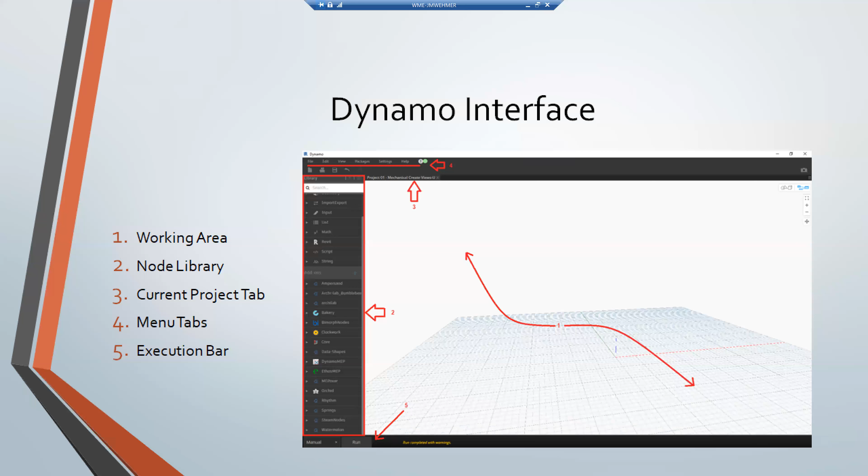Let's get started. All right, so this is our Dynamo interface. As you can see, we've got this big open area for working - that's where we're going to drop our nodes that we see from the node library, number 2. You can just go through and you can see it's separated into two pieces where it's got out of the box, and then it's got a separator for add-ons - those are all packages that you can download from other users. Number 3 just shows you what your current project that you're in.

And then number 4 is the menu tabs. It's very intuitive, it's Windows-based, so it's intuitive, and it's a lot like Revit. And then the execution bar down on the bottom, that's when you're ready to make Dynamo talk to Revit. That's how you push and pull data from Revit or push and pull from Excel, whatever kind of function you're going to be running.

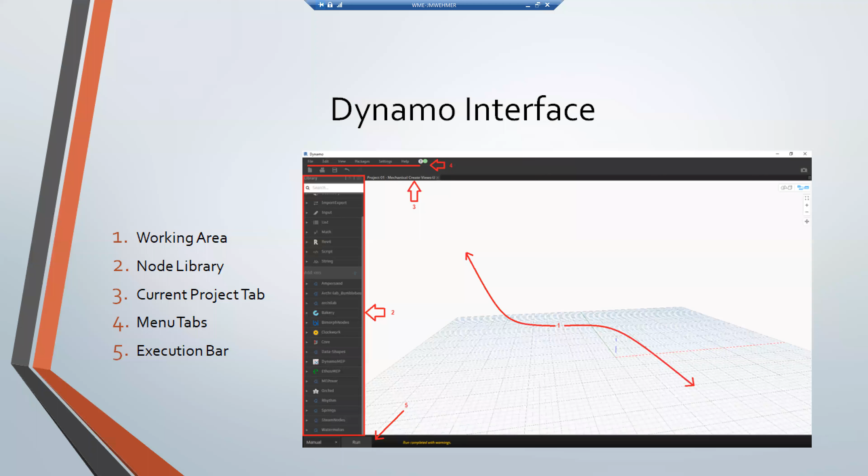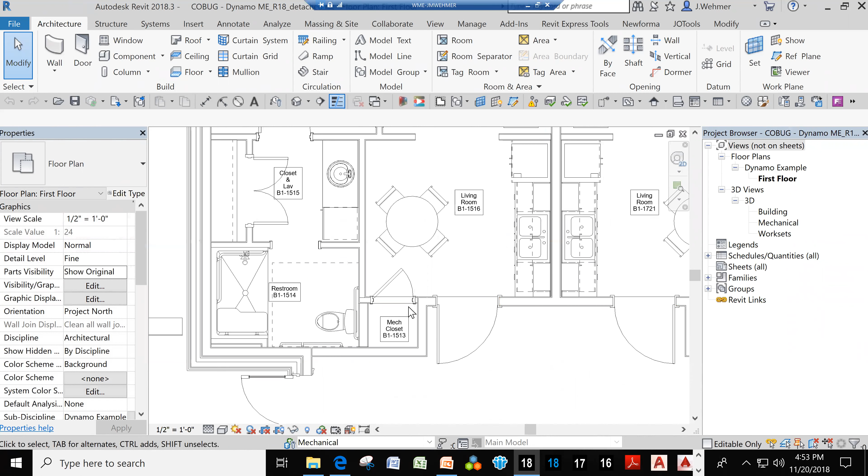So say we need to place a whole bunch of air handling units, and you can use this for any discipline that you want. We want to put them in these mechanical closets, and that's a room, I believe. Let's wait for it to stop regenerating. Yep, that's a room. So say we want to go in and immediately place it in it. There might be 100 of those in the project, and I don't want to place 100 of them manually. That, to me, would just be extremely boring.

So let's fire up Dynamo. To get to Dynamo, you go to Manage. I have mine docked down here because I like to dock the buttons. If you ever want to dock them, just right-click and hit Add to Quick Access Toolbar, and that'll add it up here, but then you can bump them down low. So let's fire up Dynamo.

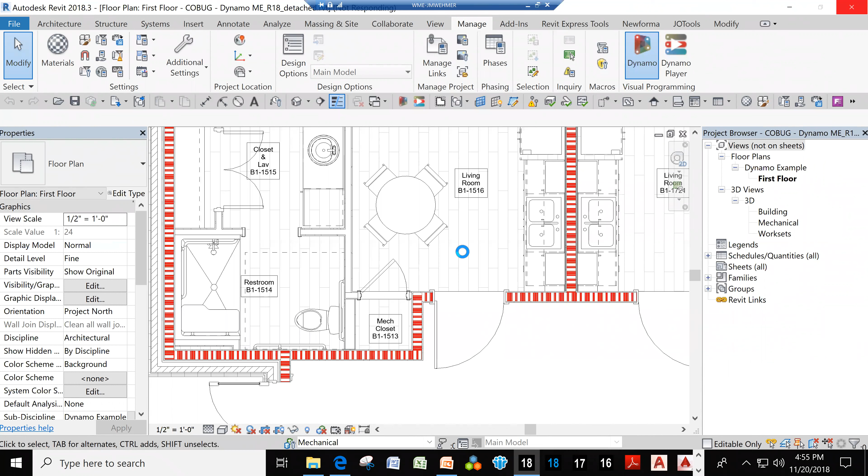Oh man, Dynamo is really taking its time today. And it's a normal thing for your computer to do the not responding. Dynamo and Revit take a lot out of your computer, so save and synchronize frequently. That's another best practice I should bring up.

You can just click over here and do your open, but I always recommend going to the open and then clicking your family or your Dynamo file that you need, and making sure that open in manual execution mode is always checked. If you open it in automatic, there's a chance it will crash your computer. It's very hard on your RAM if you're not careful.

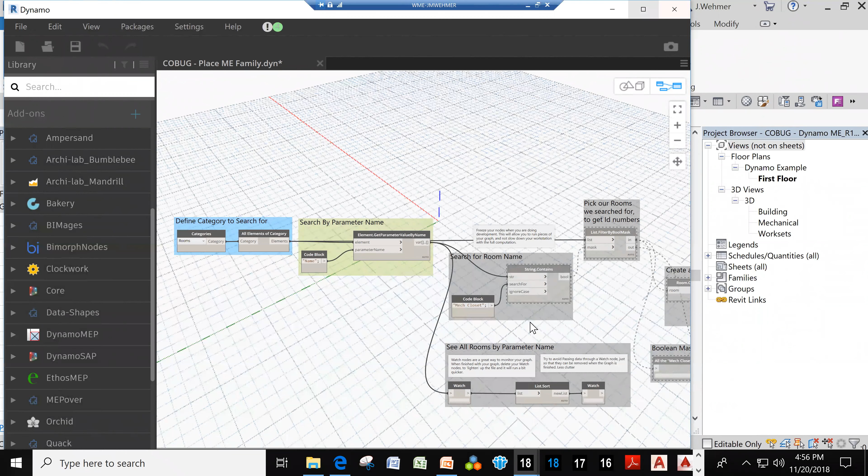Alrighty, that one opened up pretty quick. Widen up this screen and go through this a little bit. Alrighty, so whenever you start off, you always have to bring data in from Revit.

You have to know what you're looking for. In this case, we're looking for rooms because we want to find all of those rooms that have the name mechanical closet or mech closet. So we're going to get the category of room.

This is literally just the categories that you see when you go to visibility graphics and stuff like that. Anything - you can reach into Revit and get anything that you need on this list. See, it's quite comprehensive. So we're going to click out here and stay with our rooms.

And then all elements of category. If you leave it on just category, Dynamo is just going to say, oh, you just want the category room, and give you the name room. But if you do all elements of category, it's going to grab you every room in the project.

So let's hit run. I do have this one frozen over here so that it won't try and run our whole graph and take forever.

Alrighty, so see, we got just rooms. If you had that singular without this all elements of category, that's all it would display. But since you have the all elements of category, it's going to give you every room in the project along with their ID number, so that you can click this

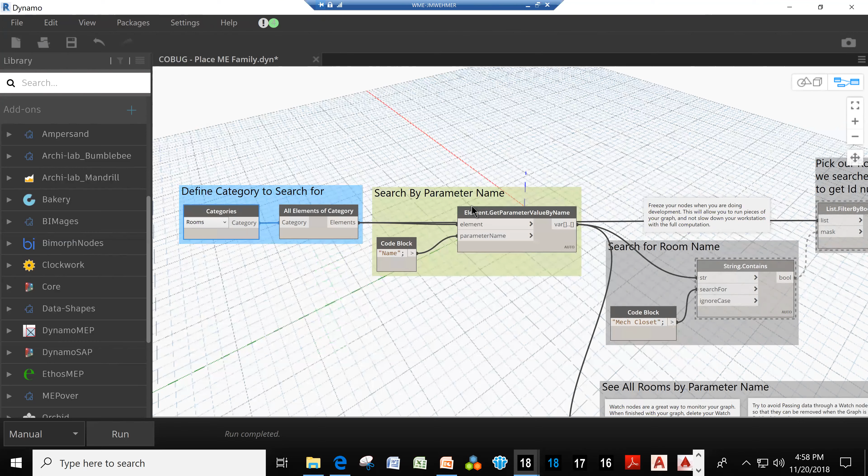So let's come over here. This is where you're getting a specific parameter. And if you hover over the name on most of the boxes, or on most of the nodes, they'll tell you what their purpose is.

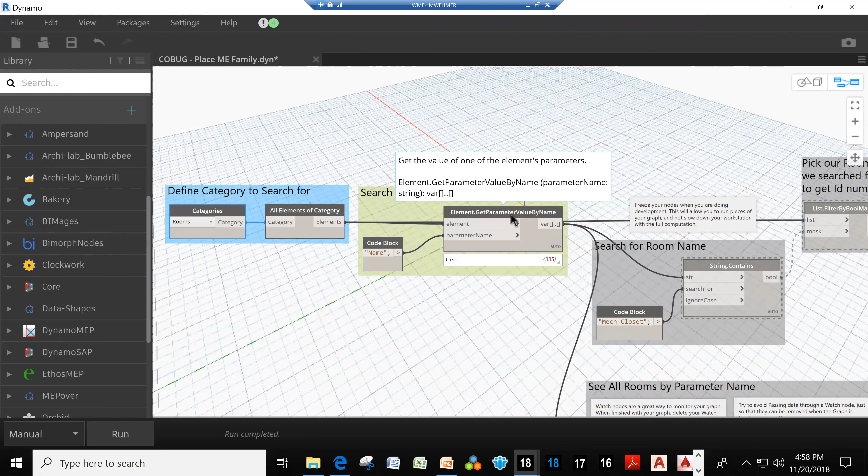And then you see at the very end of that, it's got parameter name, string, and then var, bracket bracket, dot dot bracket bracket. That means it's looking for a variable type parameter. So you can enter numbers, you can enter names, you can enter anything that you want into that bracket, just so long as it has a number like this after it. And you'll experiment later on and you'll realize there's a bunch of different ways to get data into that.

And out of all the elements that we're getting there, we're going to look for its name. So that would be the same thing as going over - coming over here. Of course I had it and then I lost it. There we go. Coming over here and looking for name, Mech Closet.

That's all it's doing. It's just jumping over to the Revit file real quick, and it's looking for all the names. So once it does that, it comes back with 335 names, and they all correspond exactly to how they are on this list. So we know that's a mechanical closet right there. And it gives you the names out of everything in here.

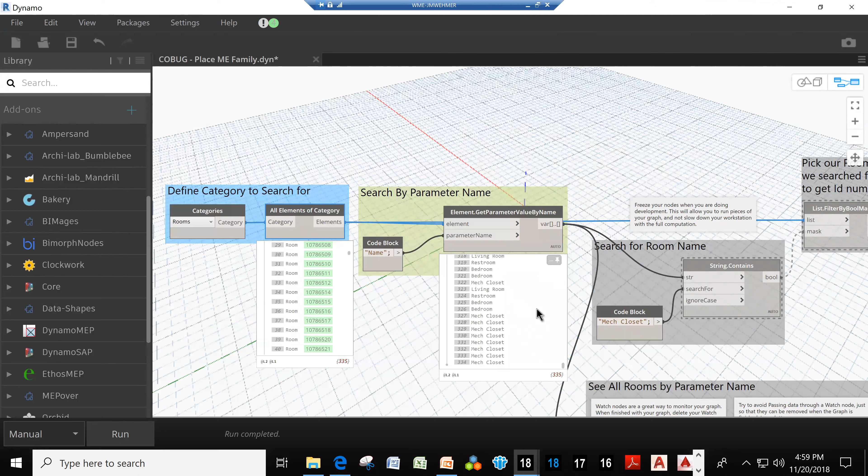After that, we're telling it to go search for a room name, mechanical closet. I also have, for the sake of this presentation, a little wire drawn down here, just so you can see how we can...

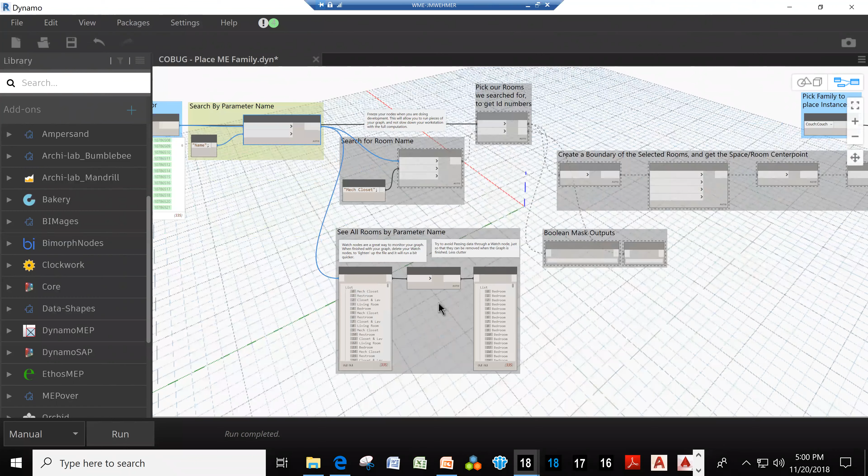Sorry, my computer's being a little slow today. Alright, just so you can see how we can play... oh, too much. I cannot find a nice middle ground here. That'll work.

This is the wire that came straight from getting the room names. Watch nodes are, again, a great way to monitor your graph. They don't take up hardly any memory, and they show you what data is going through. You can also sort them, put them alphabetical if you want. There's a bunch of different ways to sort them, but the default sort node will put them alphabetically.

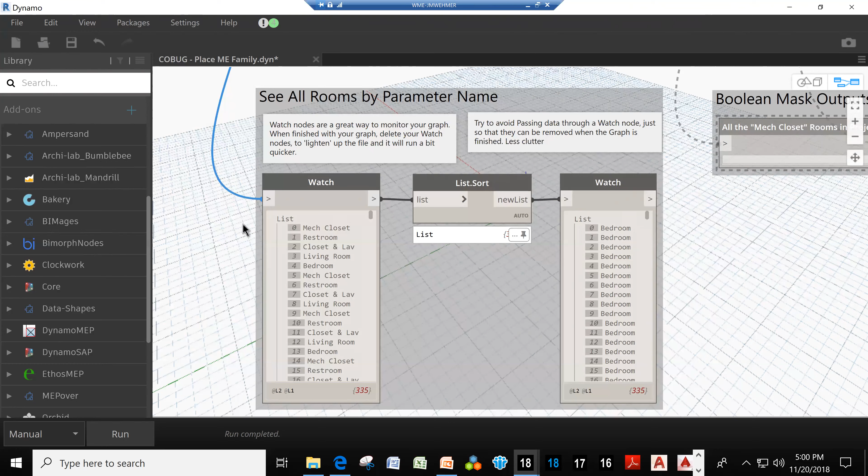Not planning on doing anything with that data. I just wanted to show y'all some of how you can organize it.

I'm in our conference room, remote linked to my workstation, so it's a little laggy.

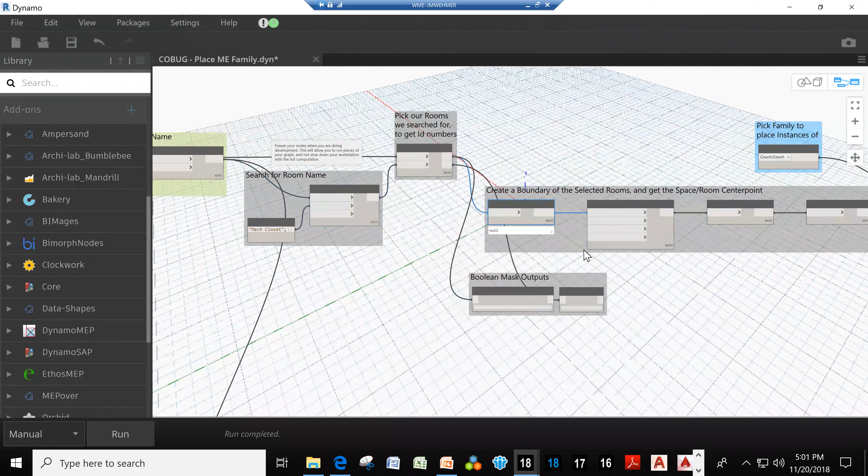Over here, we're going to unfreeze this, but I'm going to go ahead and leave that frozen just so it doesn't run our whole graph just yet. Alright, so we're going to search for a room name. Keep scrolling. Alright, good, we're going to search for a string that contains room name.

You feed in that variable as a string, and then you're searching for Mech Closet. You can ignore the case if you wanted to. I usually leave it, since the default value is false. I usually leave it on that.

That will tell you—drop this guy back down, scroll all the way up. That will look at each individual piece and tell you if that name contains Mech Closet.

So we got instance 0, Mech Closet, true. Instance 1, restroom, that's false. You go all the way down to instance 5, Mech Closet. It will give you a true/false value for every one of them.

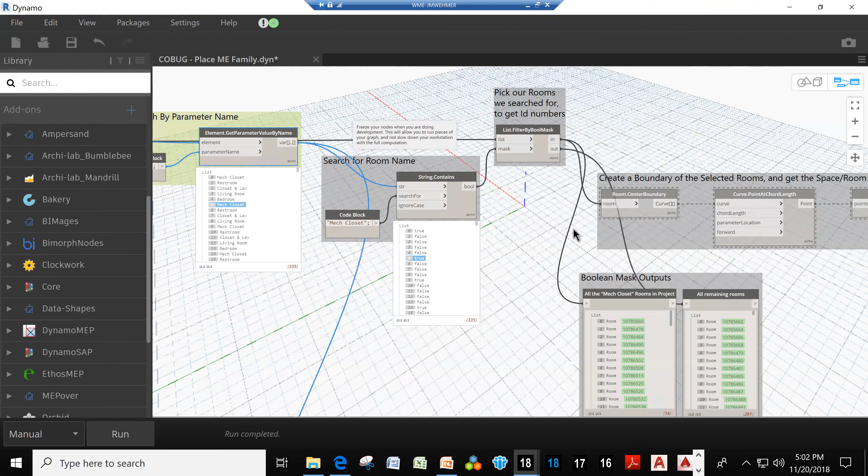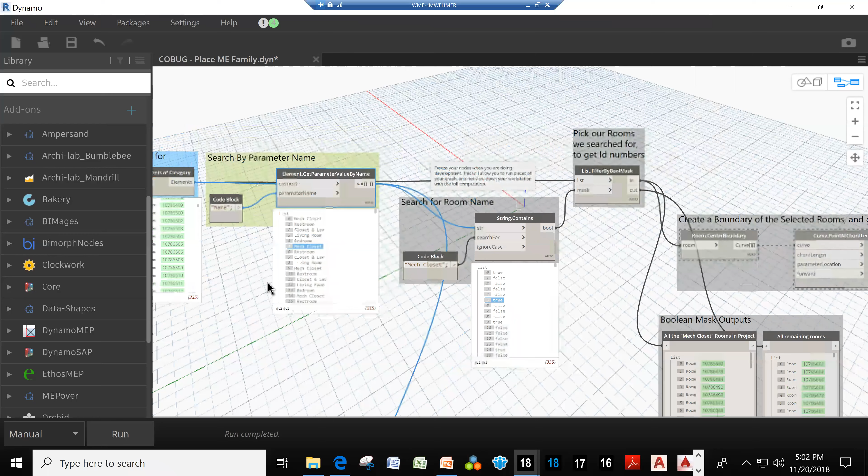But as you notice, it doesn't have a number after it anymore. After we went through get parameter value by name, it removed that element ID from it. You can't find that element anymore in your model now. You know the name of it, but Dynamo can't run the direct element anymore. It can get you that data and manipulate the data all day long, but it doesn't have anything to reapply it to.

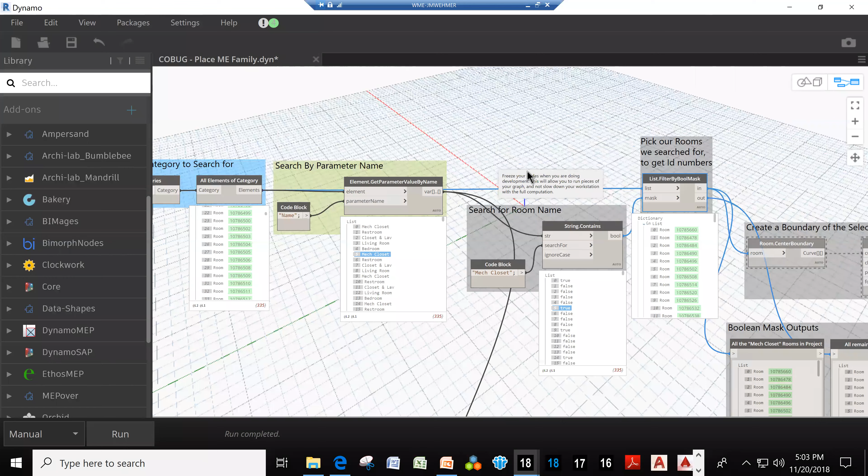That's where list filter by bool mask comes in. That will create you a dictionary that takes this variable as your list and your boolean value that you had here. And let me scroll over just a little bit. It will match—too far—it will match every true with the corresponding room. That way you can reapply it.

You can be like, oh, so everything in this list right here—you can see it breaks it down into in list, out list. The in list is everything that contains room, mechanical closet.

So that is, let me click that again. That is all 74 of these instances. And I say 74 because in programming, you start at 0. You don't start at 1.

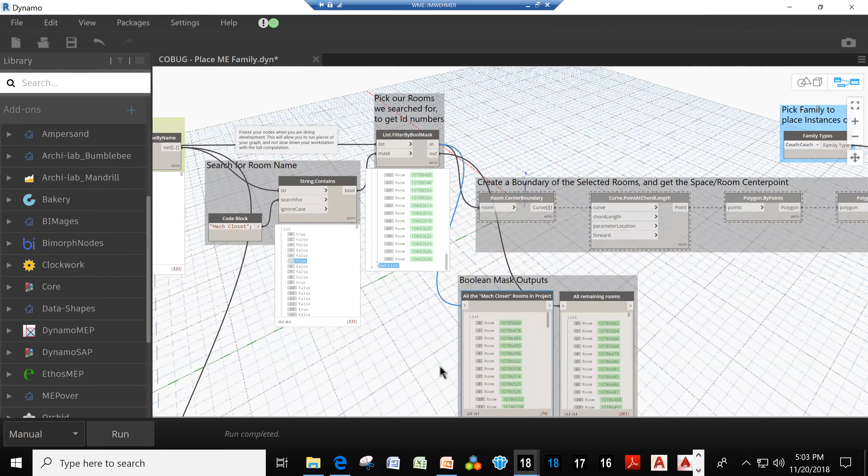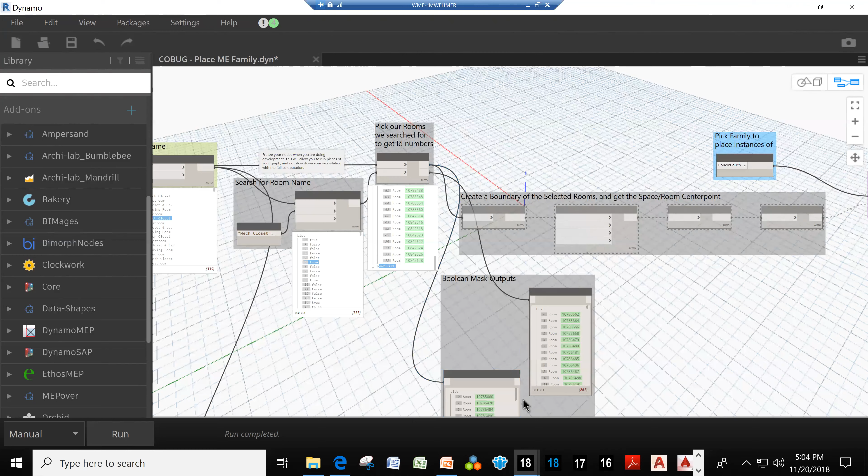So you see we have 74—no, I don't want to search anything. We have 74 instances here. Why is it trying to get me to still search? There we go. But this number will only go to—that is not what I wanted. Boy, long day today. Oh well, I'll just deal with that down there. Okay, apparently it's...

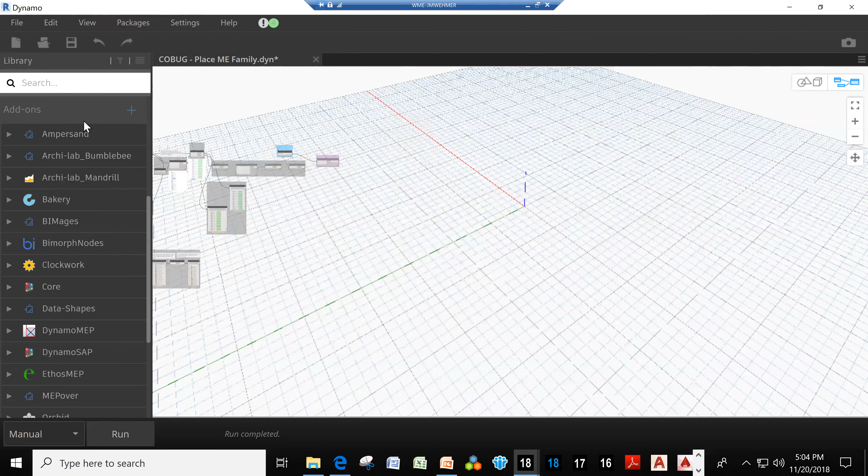But as you can see, it only goes to 73. That's just the way a lot of programming works—instead of starting at 1, they start at 0. So that's one thing that will take a little bit of getting used to once you start referencing data and writing your own code, is that it's not going to start at 1.

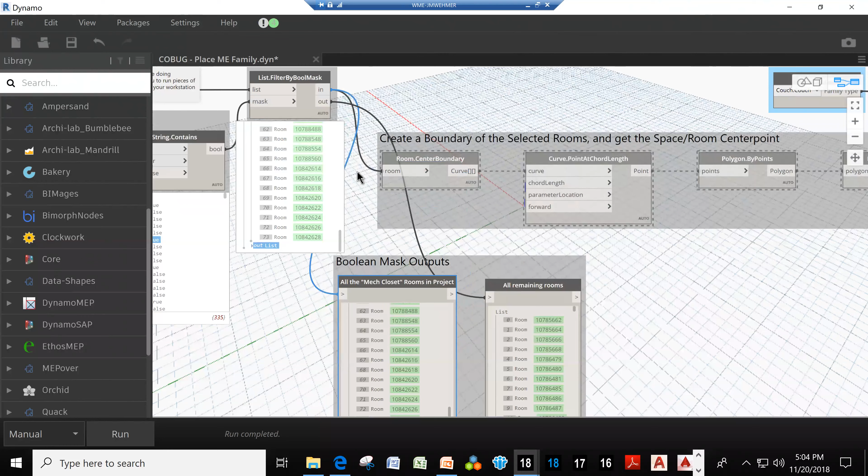So now we take—if I stop zooming in and out like a crazy person—now we take all that data, as you can see, that comes from the in that corresponds to those mechanical closets. We take that and we're going to start drawing lines on our model.

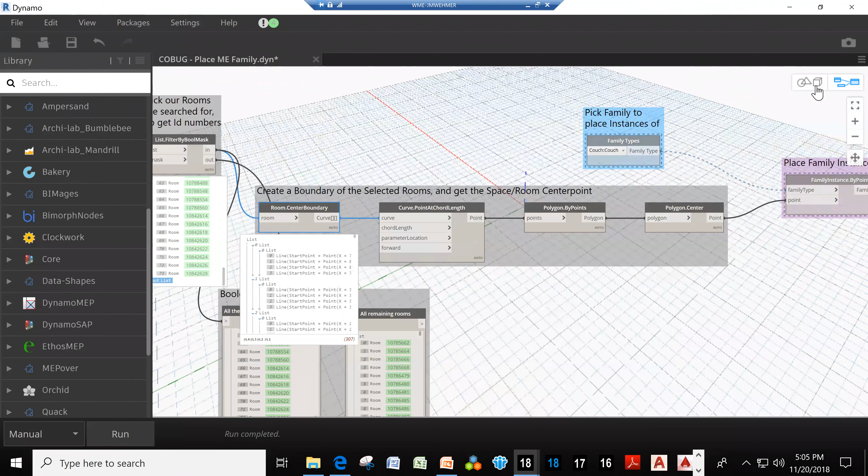We're going to start drawing lines, just little temporary Dynamo lines. You can see it gives you the start, the end, and it's 4 segments for every line point. So let's click this button right here, and we go to enabling 3D within Dynamo.

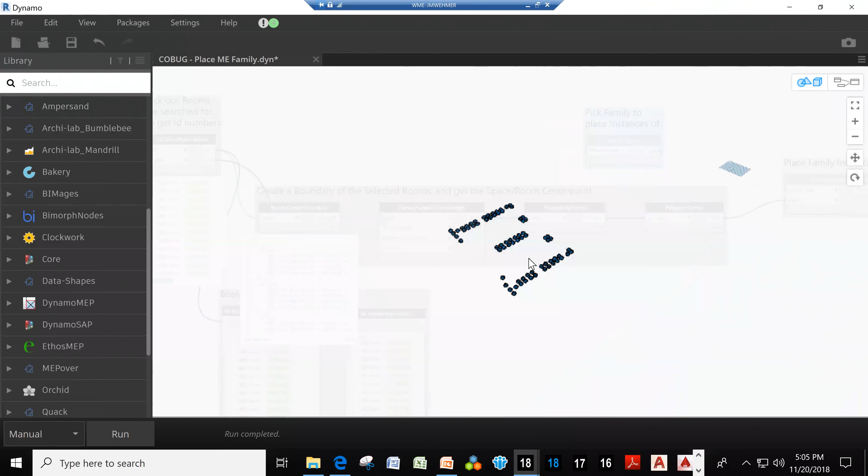We're going to zoom out on our graph and find where Dynamo is drawing these lines. Remember that it talks with Revit, so wherever Revit is at in the model, we are way off here. Our project center is way different than Dynamo's center.

As you can see, it found all the mechanical rooms, and it just drew little reference lines in there. It drew the boundary of the room, and then it drew the center point of those lines so it could get a little centroid there.

So we're going to go back over to our node. To get back to nodes, you just hit this one, Enable Graph View. You can switch between the two pretty easily.

That drew us little chords, and then a polygon to go with them, and then a point at the middle of the polygon. The point at that middle of the polygon is where the center of your Revit family is going to be placed.

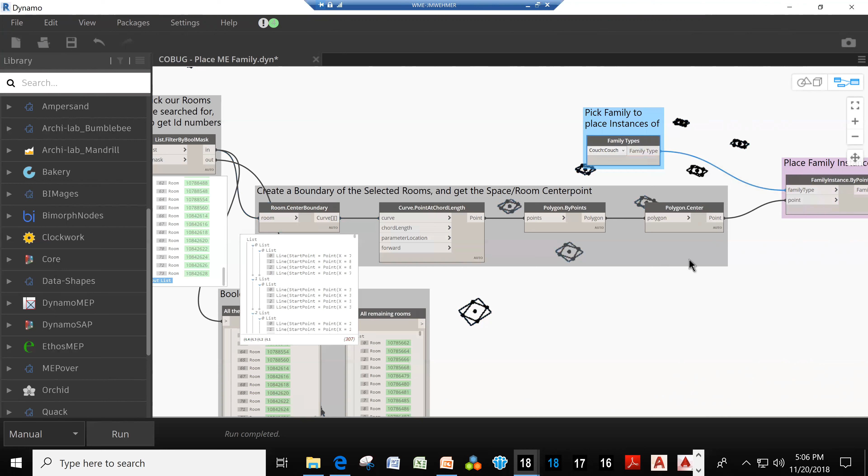So it's very important that whenever you build your Revit families, you build them on the center. I've seen some people do sloppy modeling and just build it in quadrant 2 or quadrant 1, wherever they feel like it. Just alone for Revit, that's bad practice, but then you try to communicate and program with it, and that's going to be more hassle for you.

Then family types, let's drop that down. We don't want a couch. We want, let's do... oh, I passed up what I wanted. Let's do the gas-fired furnace. So now we have a family that we're going to put here.

It's going to take that center reference plane of the family, look for this polygon center, and place it right on top of that. So let's hop over to Revit.

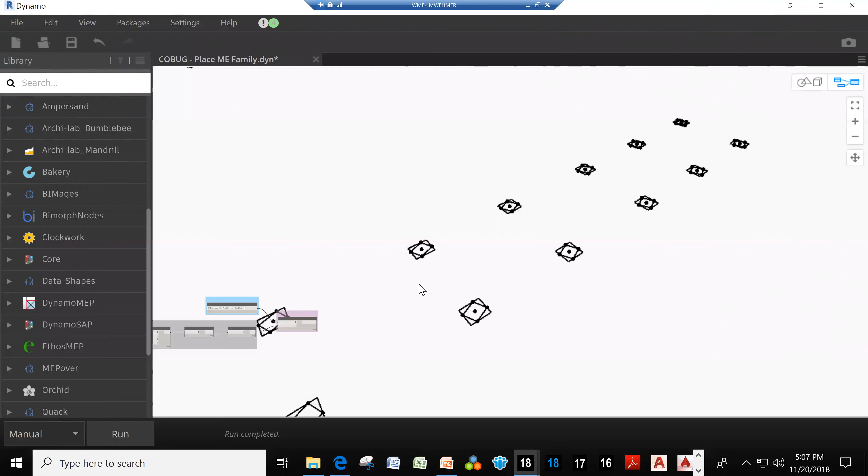Oh, I forgot, within Dynamo you have to collapse it in order to get to Revit, because it wants to be on top, it wants to be the popular one. So for that center point, you can see it's already drawn some temporary lines in our file, and it's got a little center point right underneath that mechanical closet tag.

If I can ever grab that tag... alright, that little point right there is where it's going to drop the middle of that family.

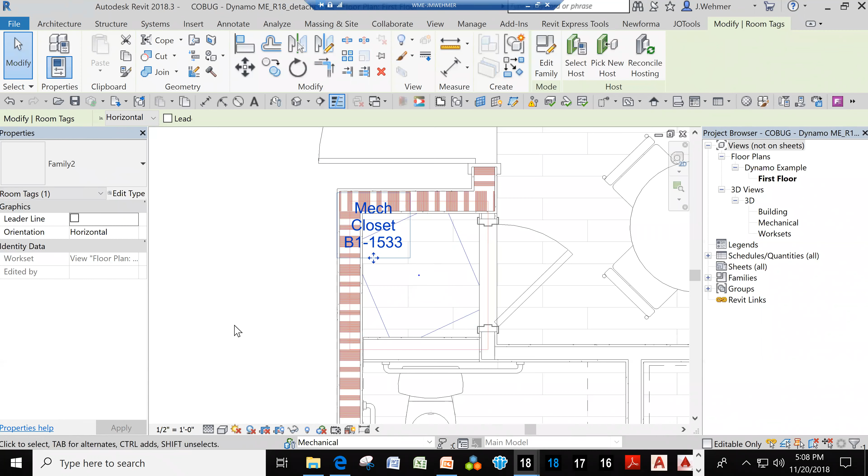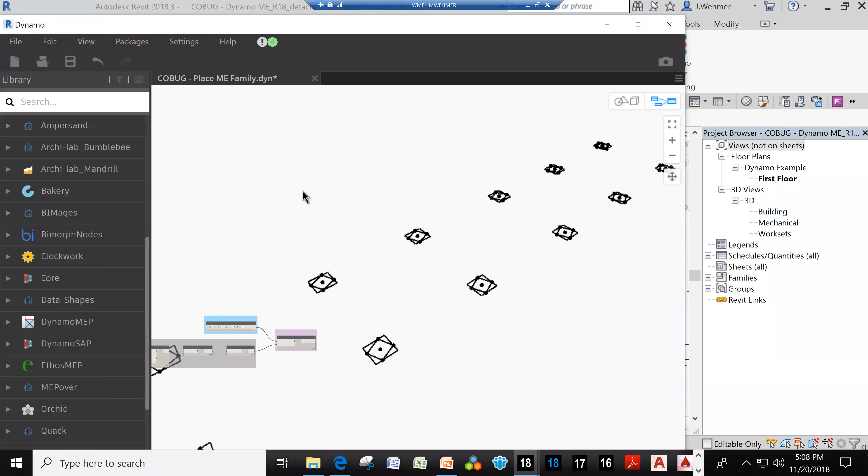So let's grab our Dynamo again. Just for the sake of it, I'm going to put these together. There we go. Then I'm going to come over here and hit run.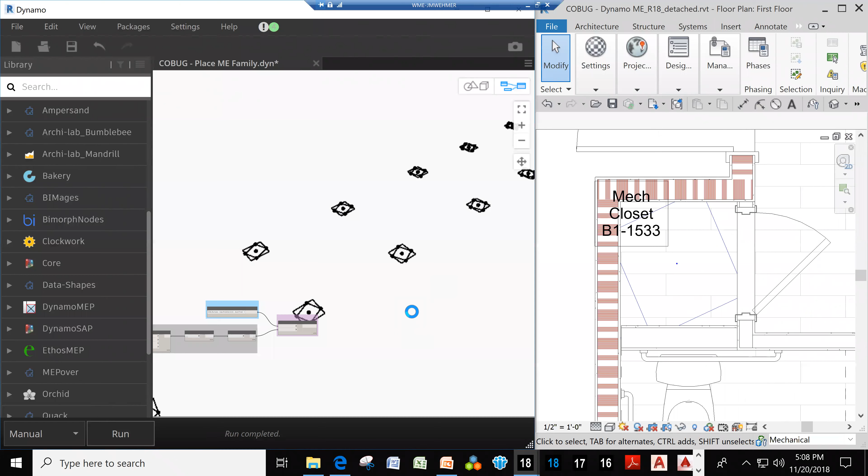We're going to be dropping a lot of families in place on this model, so it can take a minute. Don't be surprised, Dynamo is a slower form of programming than C# and direct Python interface, but it's much easier to get the hang of. So Dynamo will definitely save you time rather than drafting and doing everything by hand.

But be prepared to be looking at this spinning circle a lot while you use Dynamo. If you were doing this on a project, now would be a great time to go get a cup of coffee, go do what you need to, go get a snack, kind of take your time and catch up on the way back to the desk.

If I thought this was going to take more than 2 or 3 minutes, I would have already done this and had a file ready for y'all, but based on my testing today, it's not going to take more than a minute or two. So hopefully it doesn't.

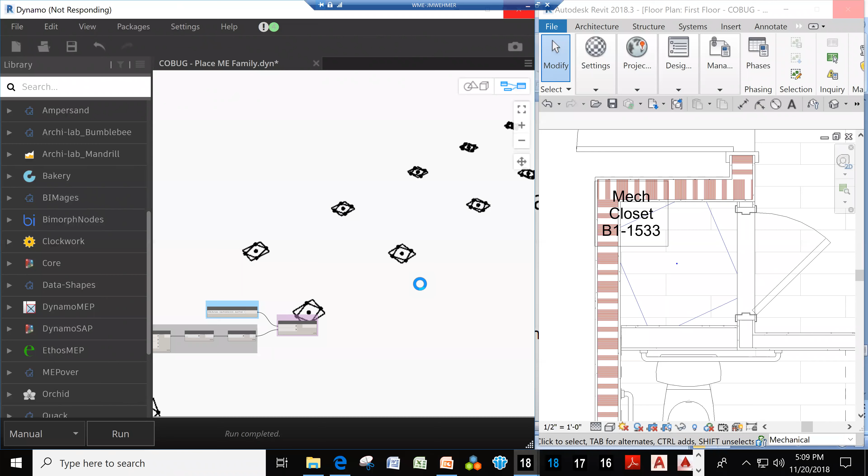And as you can see, Dynamo says it's not responding. That's pretty normal. There we go. Now we got our family in place. Let's make the Revit screen big again.

I forgot, Dynamo always wants to be on front, so you've got to close down Dynamo, or at least collapse it.

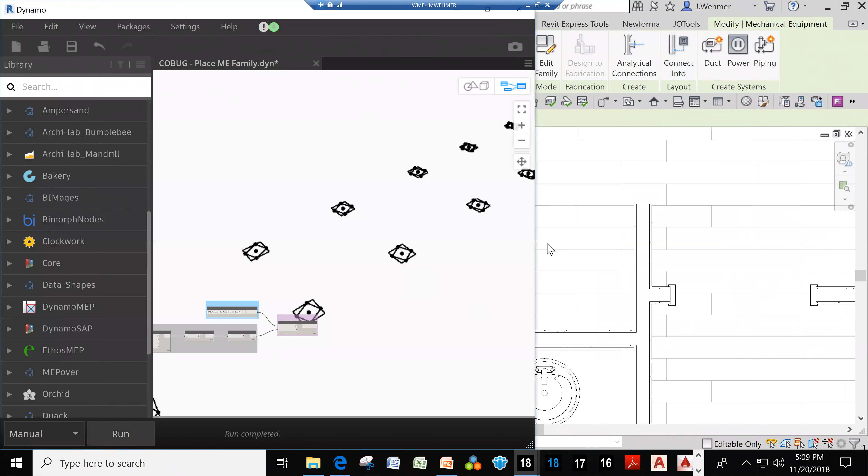Alrighty, so we wanted to put that gas-fired furnace down, and we got the gas-fired furnace. Now let's right-click it and select all instances visible in view. Let's see how many we placed. We just placed 74 of them.

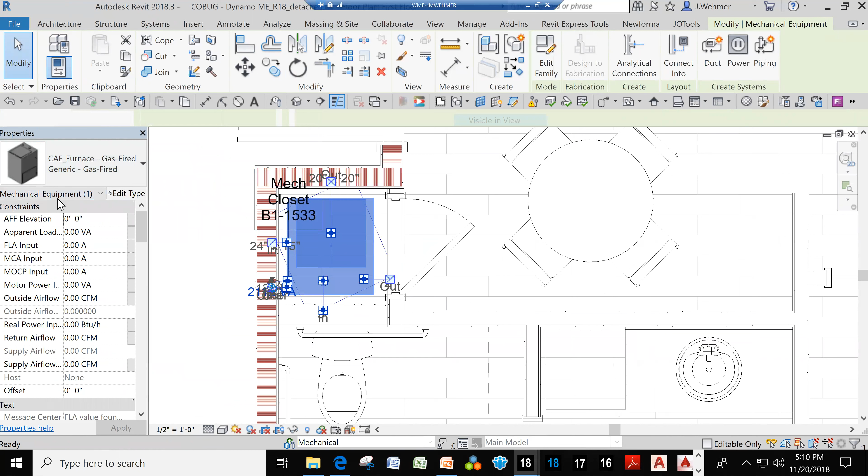So we basically just went through our entire first floor of the model and placed a whole bunch of those mechanical units.

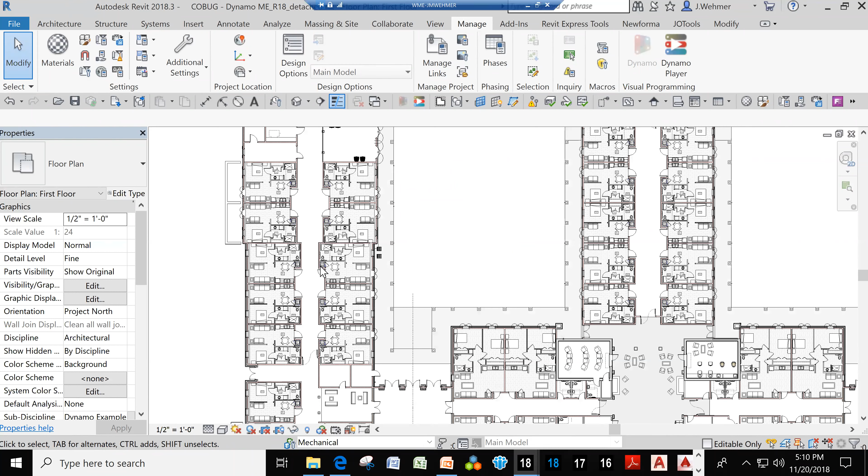As you can see, Dynamo still has those little bits drawn on there, those little blue lines. They'll go away once we close Dynamo. Those won't print, even if you printed it as is. It's literally just Dynamo referencing it.

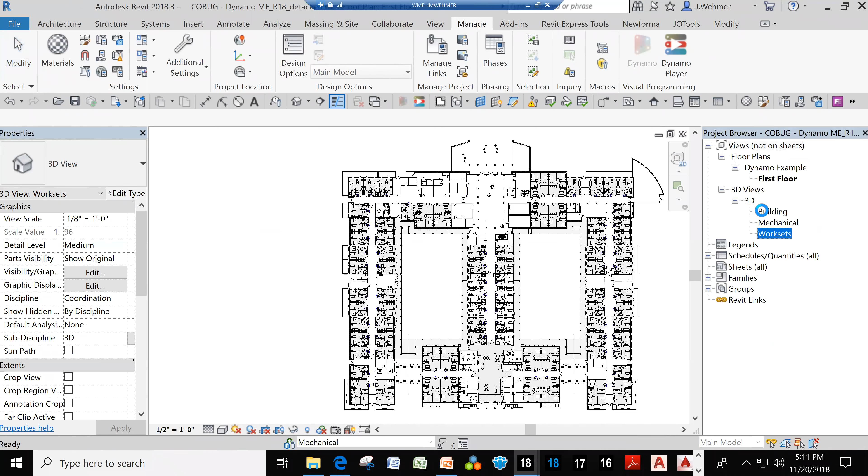So let's go to a little more friendly view for this. Let's go to our Worksets, to get just a better view of what all we created. And then let's turn on our work set display.

And as you can see, everything in that pinkish purple is architectural work set, whereas everything in green is mechanical work set, and that's all mechanical that we just placed. I've helped architects use this for laying out kitchens, bathrooms, and bedrooms. It's very useful, especially for apartment and residential style living like this.

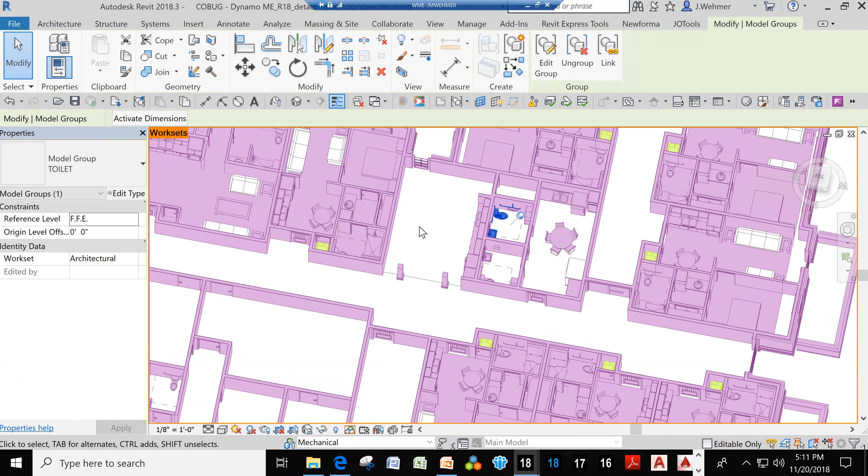It's just like groups, it just runs them throughout your model for you. So it's really helpful. You can basically place any that you want as long as the family is loaded into your project already. You can also do family modification, changing types. Say you wanted to change this love seat into a 3-cushion throughout the entire model.

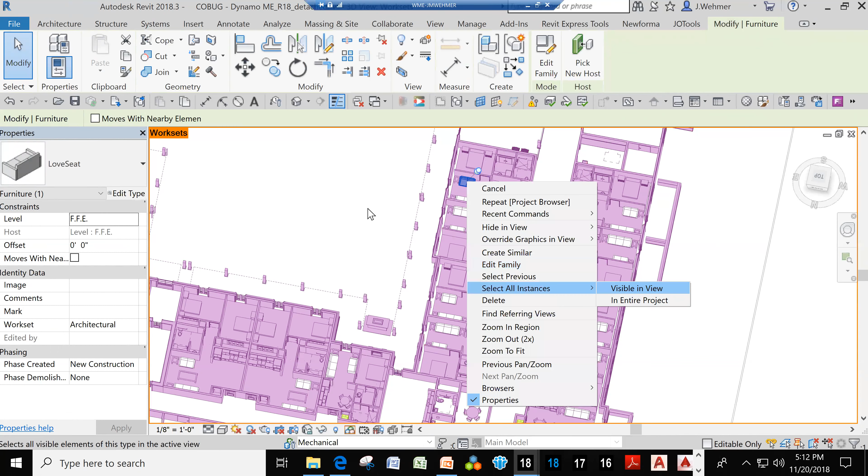You can do that with Revit or with Dynamo. You can easily swap them out, which Revit actually has that handy select all instances feature. But say you also wanted to change some parameters and give them separate scheduling features based on what room they're in. With Revit, you'd have to go room by room or piece by piece. But with Dynamo, you can have it do multiple functions all at the same time, and it works seamlessly with Revit.

So let's go ahead and close out of this one. We don't want to save our changes.

And then let's look at a project setup one. I'm going to close out of this project because this setup graph I'm about to open is really heavy on the computer. So we are literally just going to create a blank project, Imperial, and let's open Dynamo again.

After working with Dynamo for a while, you start to realize some of its little quirks, some of its little things that don't make any sense or seem like a huge weirdness. One of the things I've noticed is that loading large scripts is difficult on Dynamo right when you open it.

Don't know why, but I have found the most luck. Oh, before I jump into that, if you ever need to search for a node, hit right click and it brings up a search bar for you, and you can just type in whatever it is you're looking for.

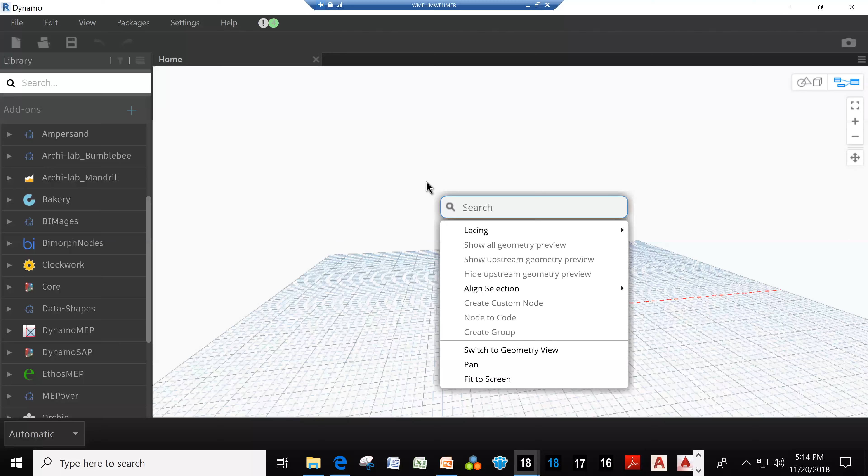So for some reason, when I start a new graph, place a watch node in there, and then go to open a really large script, it has almost no issues loading it. Of course, now that I say that, it's probably going to freeze this time and crash, but most of the time it doesn't have an issue with it.

My control bar for the webinar keeps trying to overtake this area. Here we go.

Alrighty, and of course always make sure that you're opening in manual mode, because as you can see, it opens default and automatic when you start a new graph. So if I open this in automatic, it would be trying to open this and run the program at the same time. That's not what we want to do, not yet.

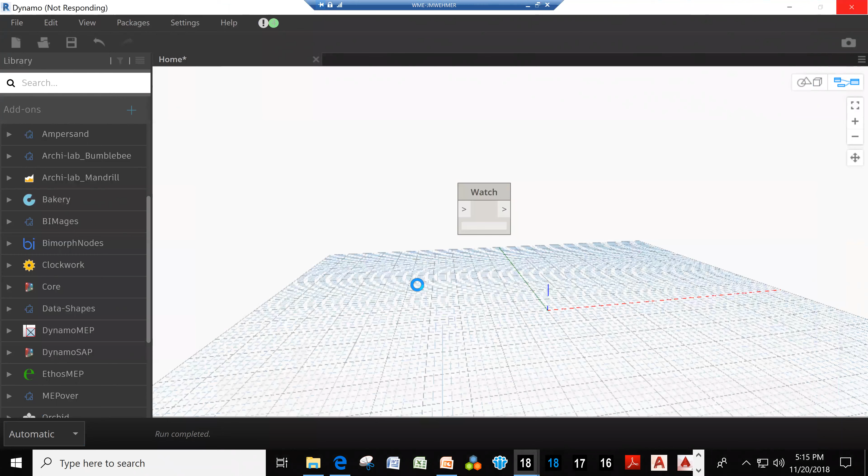And it is a big graph, so it takes a minute to open. I pared this one down to make it easy to manipulate while we're in such a short time for this. A great way to organize your graphs

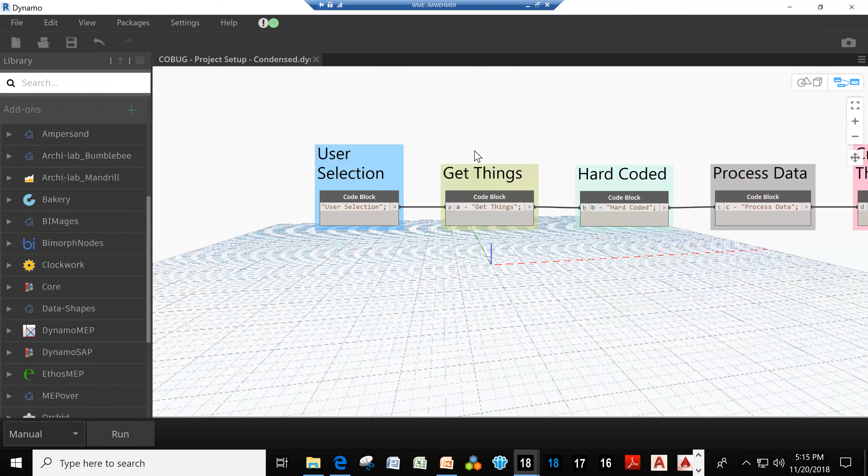is to come up with a little color chart for yourself of what's going to be user selection, what's getting things—in other words, basically just reaching into Revit, grabbing the data, and then doing whatever it wants to with it. What's going to be hard-coded? There are some things you just have to hard-code with some graphs whenever they're as specific as a project setup. You've got to have a plumbing version, a mechanical version, life safety, fire protection, electrical, etc., etc.

You're going to have to tell it to do some very discipline-specific functions, and then process that data—basically changing the units, changing parameter names, doing what you need to with it, shaping that Play-Doh, shaping that clay for it to create Dynamo things and create Revit things, and then ultimately writing and creating data. These are where Dynamo really shines, the last two.

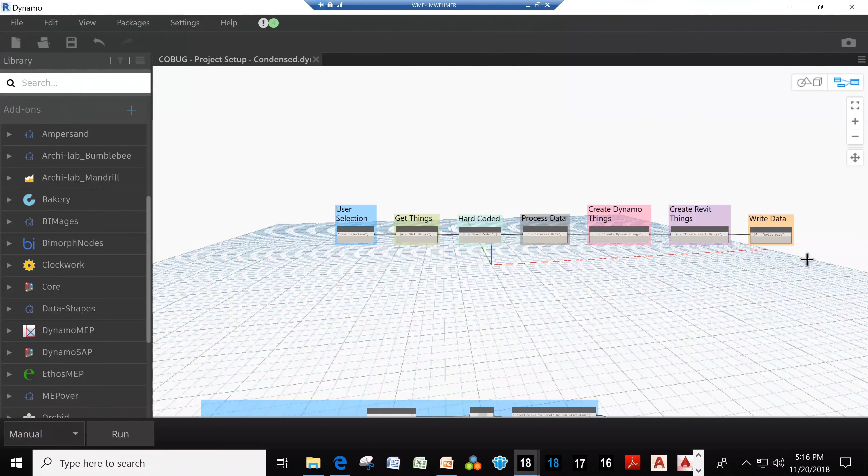So let's come over here. I cannot get this scrolling thing today. Let's come over here. I am going to freeze this node just so that it doesn't try and run our graph for us.

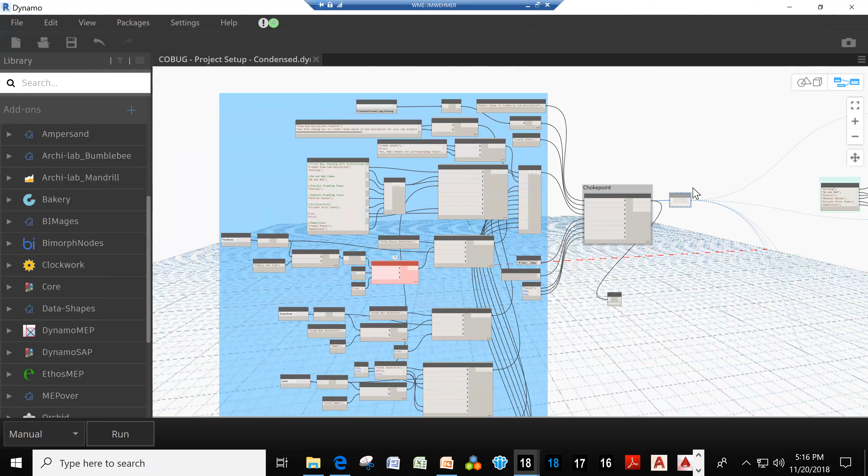This is all a user interface, basically just UI. It's meant that when I execute this run, a dialog box will pop up prompting the user. Oh, it's because my title block is not feeding properly. I'll just feed it all of it.

And then anytime you run Dynamo, you have to make a change to it. So switch false, and then run it again. I don't think it ran whenever I did it.

Alright, let's try this now. It is still giving us an error. But the user interface is basically just where... ah, that's annoying because I just ran this like an hour and a half ago and it worked fine.

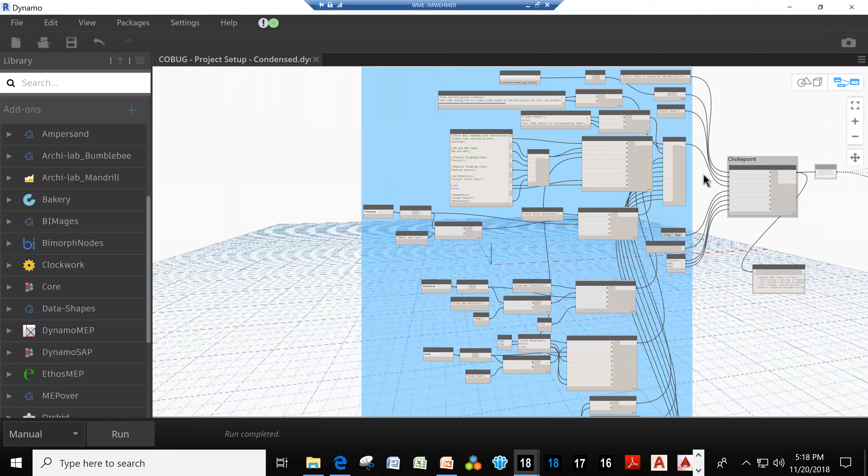It's still not. This always happens, it always... oh, I should switch it to true. That's...

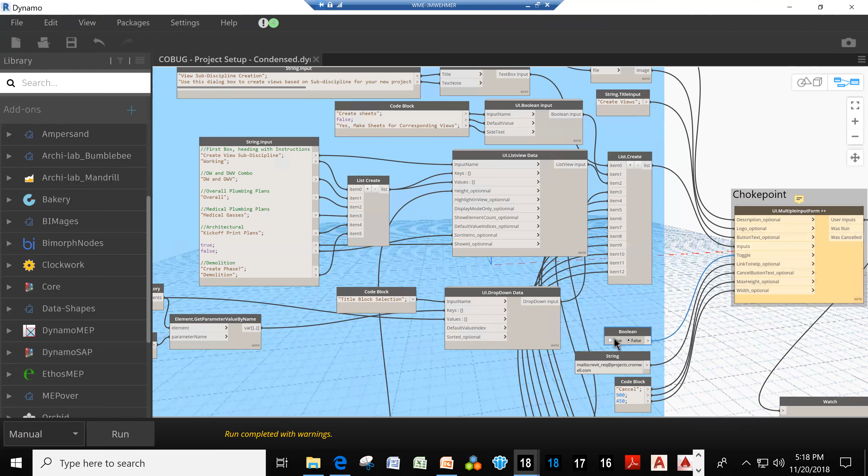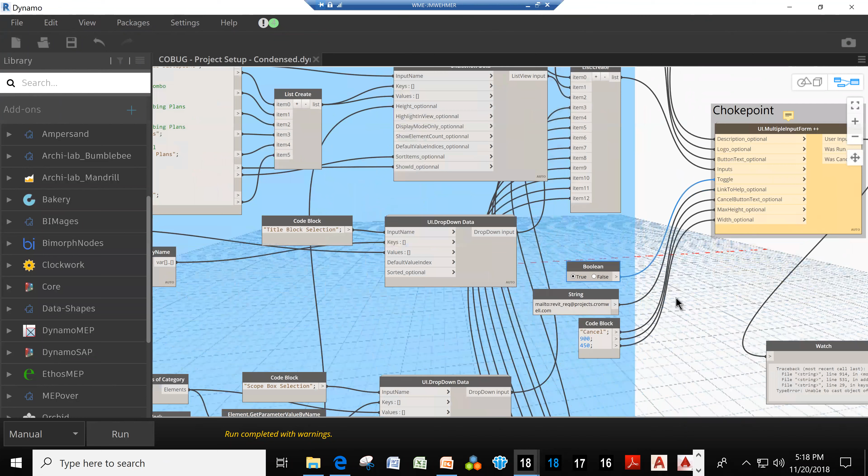Alright, I apologize for this. I ran it this afternoon and it went just fine. Well anyways, that's when it would pop up.

This one is for my plumbing project setup script. So let me zoom us back in here without zooming crazy fast. It would ask us if we want to create working views, domestic water and drain waste vent, overall, medical gas, and then those kickoff print plans that I was telling you about.

And then if we want to create them with phases, and then it'll ask us what title block we want to use, what scope box. You can basically have it create your entire list for you.

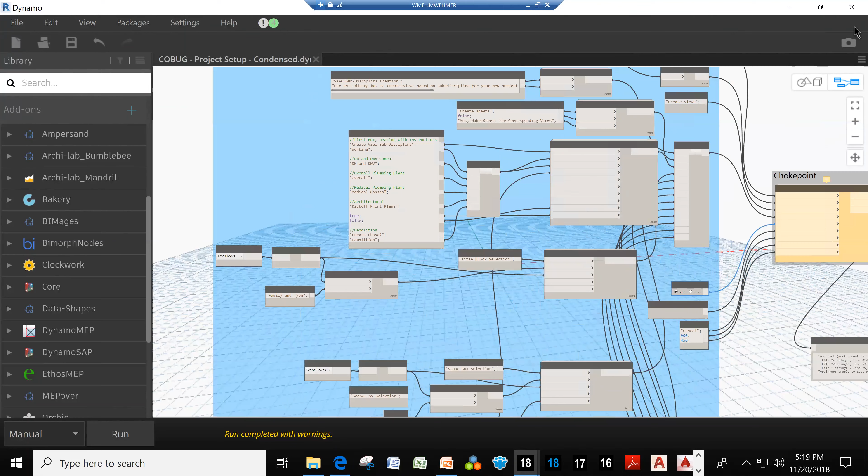And it is being really laggy today. I apologize for the lagginess of it. Then you basically just go through, and this is one of those times when hard coding is a thing.

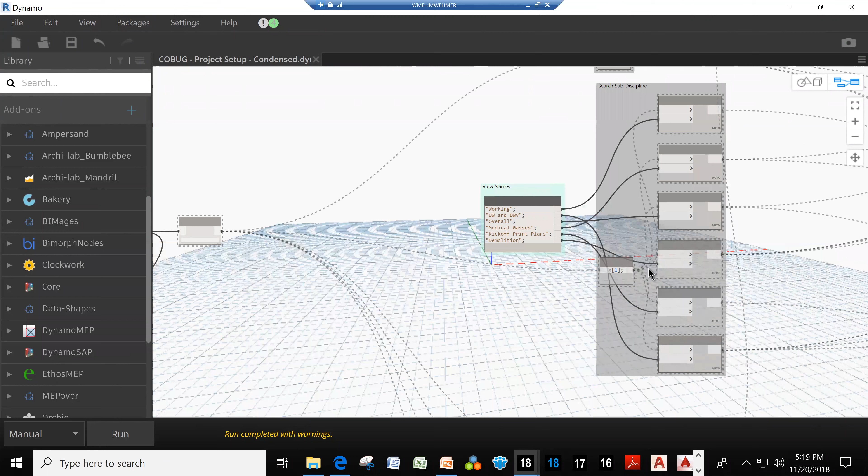You always have to tell it drain, waste, and vent, domestic water. You can't put that on a mechanical one. And then you don't want to flood the user interface with too much stuff.

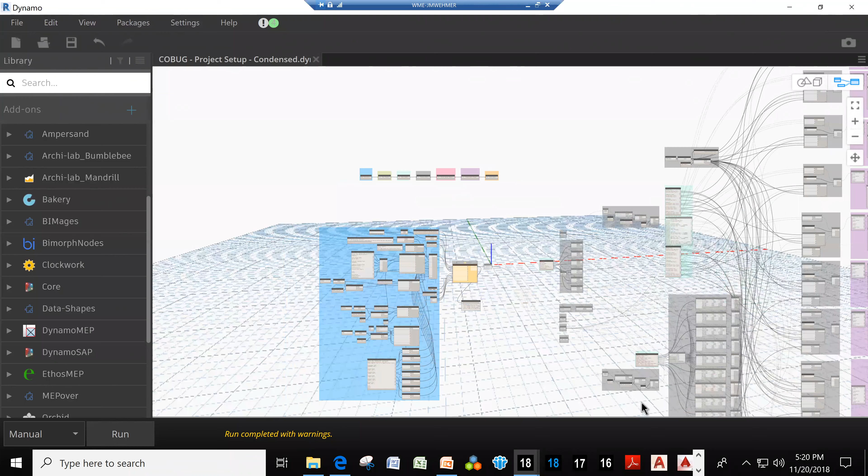A lot of this is processing that data. I really expected this to go a lot smoother so that I could show you a very detailed walkthrough.

Here's another where we're getting the name. We're getting our scope box fed into this part. We're getting the name of the scope box. We're looking for overall building. That's the generic one that I just call my buildings, is overall building.

We're running it through a test. If it does equal overall building, then provide this empty double to it. And if it's false, it provides the element here. You can see how it dots back behind it.

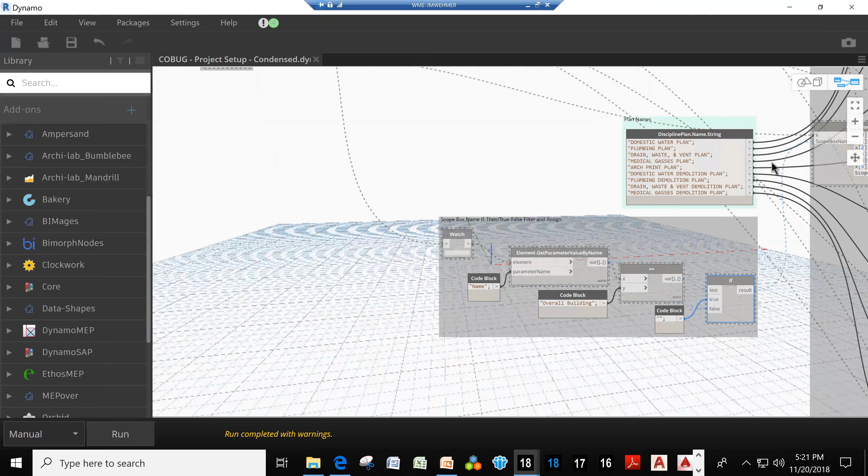Oh man, this is being so slow today. We do not want a close-up of the if statement. Or that.

Alright, so apparently my mouse here in the conference room is just right on the edge of the range of where it's good and where it's not.

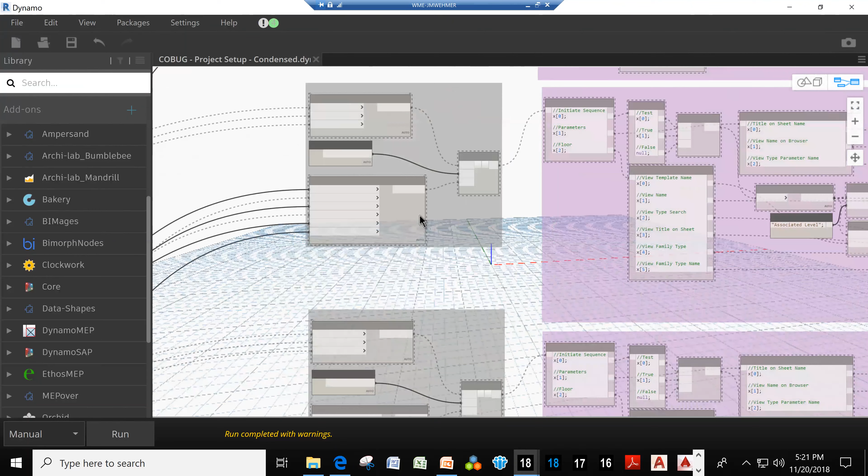Alright, and then up here we have - you'll have to organize the data that you're putting on your sheet. A lot of these ones that are here are a package that I've created.

I'm hopefully going to be releasing it online, so you'll be able to search for it up here in packages and search for the package. Hopefully you'll be able to find it online within the next couple of months. I'm doing some last minute testing on it.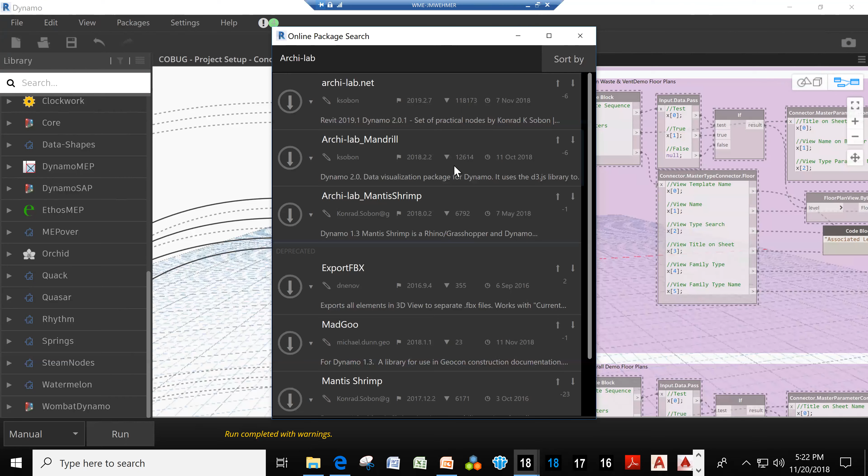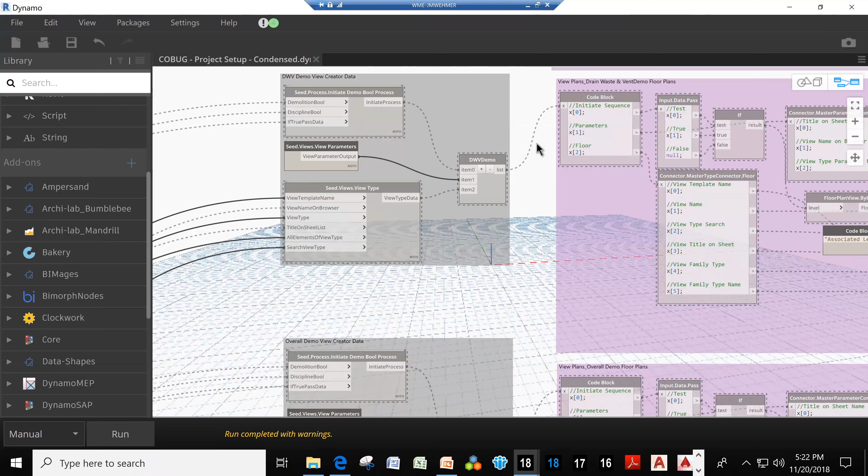I recommend it for pretty much everything. It's got a very wide variety. Oh yeah, see, it's got a couple different sub-packages with it. Super helpful. So these are - you're just processing your data, separating out your data based on what you're trying to create.

Oh my gosh. I was really hoping to show y'all a more in-depth view, but it's being laggy.

And then this node is a really powerful out-of-the-box node. Floor plan view by level. You feed it your level, and it creates you a floor plan that references that level.

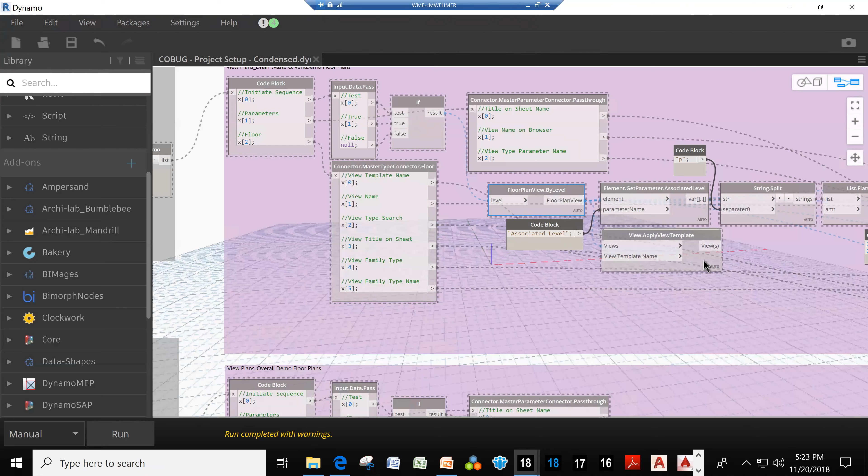So from this, I'm feeding all the levels that the user input selects. In most cases, it's all the levels that are in the project. And then you can get its value associated level, and then you can actually turn that into its own name, which is what I did. I can open up the completed version of this so that y'all can see.

Alrighty. So after you run that, you would get all of your working and construction documents.

Let's open these. You can turn the associated level into its own view name. So say it's on level 01, first floor dash 01, that's what our naming convention is. You can actually tell it to clip off everything before the dash, so you just have that 01, and then you can create your own name for it that Dynamo will auto name for you.

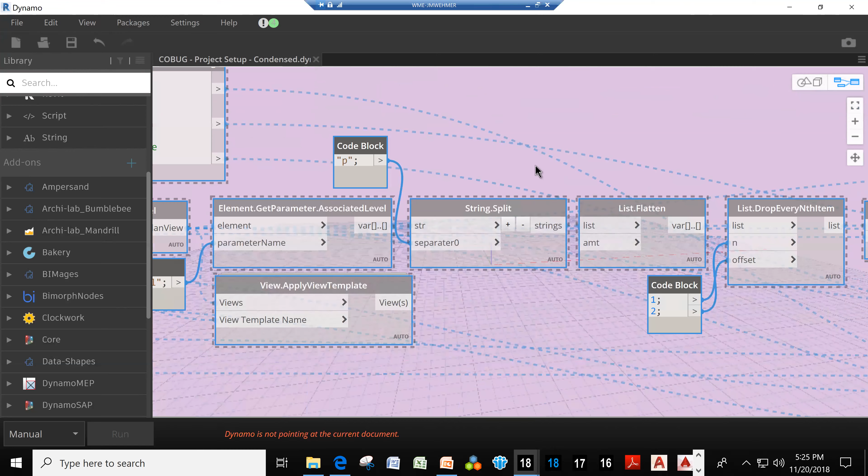I don't know why it's being so insanely slow right now.

After you create your views, that's when you can start adding scope boxes, phasing. I put this 'Dynamo created' so that I can make schedules to see what all Dynamo has created. That's a good way to double check yourself and make sure you know what's going on. Like, Dynamo created view, it'll tell you.

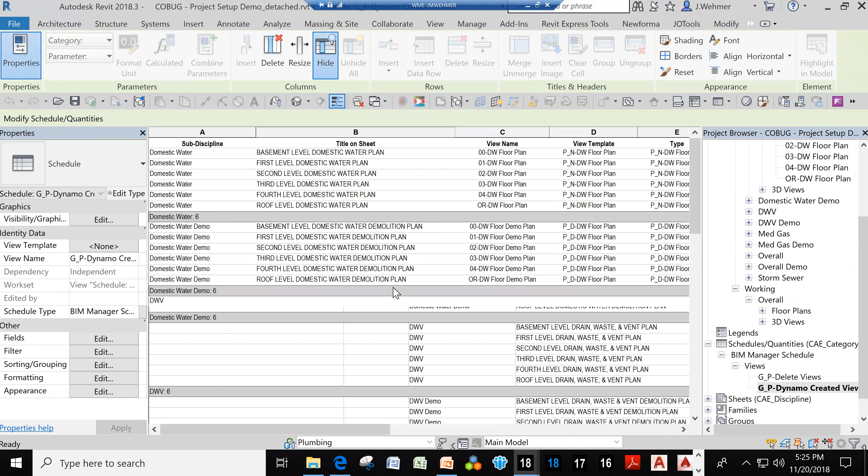I'm gonna hide those because they're taking up too much space on here. I clipped off the sheet creating part of this because it would make the file way too big. But you can tell it what subdiscipline you want it to be, title on sheet. Most anything for views, you can use Dynamo to name.

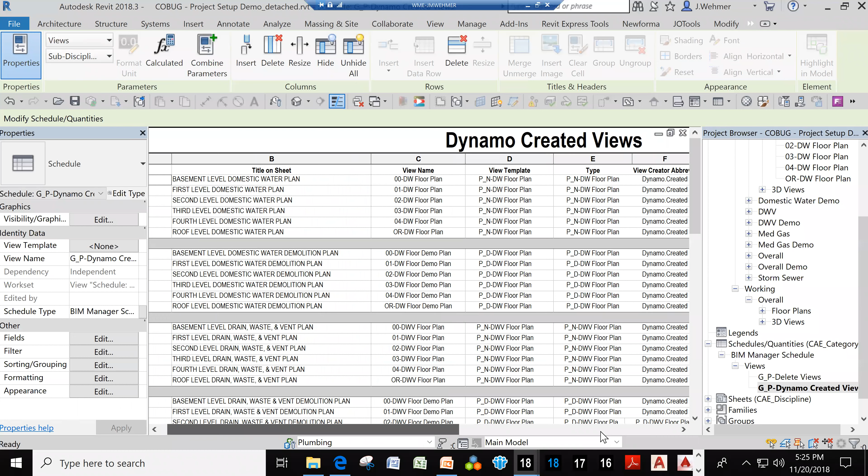Discipline, phasing, very helpful. I'll have some samples in.

I was hoping to distribute a zip file or a link to it, but if you're interested, I'll have my email at the end of this session. Just email me and I'll send you the link, and it'll have some sample Dynamo graphs in it, for things like placing mechanical equipment and other stuff. But I can't give out those scripts.

So you can have Dynamo go in and create everything for you, super quick. I think altogether it took about 10 minutes for the graph to run earlier today when I made all these, which is much faster than having somebody go in, create that view, assign a view template to it, give it a title on sheet, and give it the phase that it needs if you're doing a multi-phase project.

I really expected that I could walk y'all through this Dynamo graph, but it's being very laggy and glitchy, so I'll probably have to cut that part off.

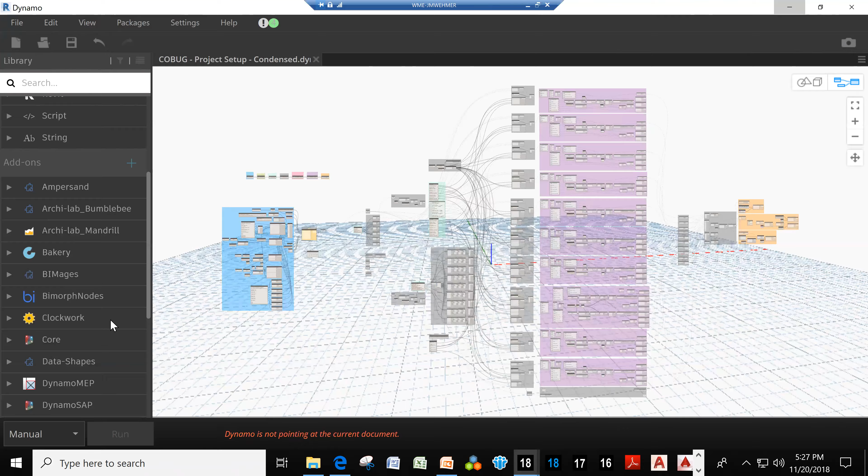John, can you hear us? Yes, we can. Okay, hang on, we'll take the mic back to Tracy here. Alrighty, she has a few questions. Hey John, I have a couple of questions. Yeah, what's up? Let me get to where they are.

Okay, so when using packages, do they expire or become obsolete? With different versions of Dynamo, you do have to keep up with different packages.

Dynamo recently went from 1.3.2 to 2.0.1, I think about 4 months ago, give or take 4 to 6 months, and they completely changed the way Dynamo codes. So all the developers of these packages had to go into overdrive and rewrite their entire library. So there were times, like y'all probably noticed that red node when we first started here in the beginning, that was because I was using a package that they had conformed to the newest Dynamo, but then they stopped supporting it and just deleted their package.

Does that happen often? It only happens when you're really dependent on one node, which is aggravating, but there's usually three other nodes to replace it by the time somebody deletes one.

The guy who writes Archi-lab, and then the other guy who writes Rhythm, they are very active on the Dynamo forums board for help and for writing their stuff. And if they see that someone is looking for something really frequently, or if a node got deprecated and it's no longer supported, they'll step in and write their own. And usually theirs are better than the one they're replacing.

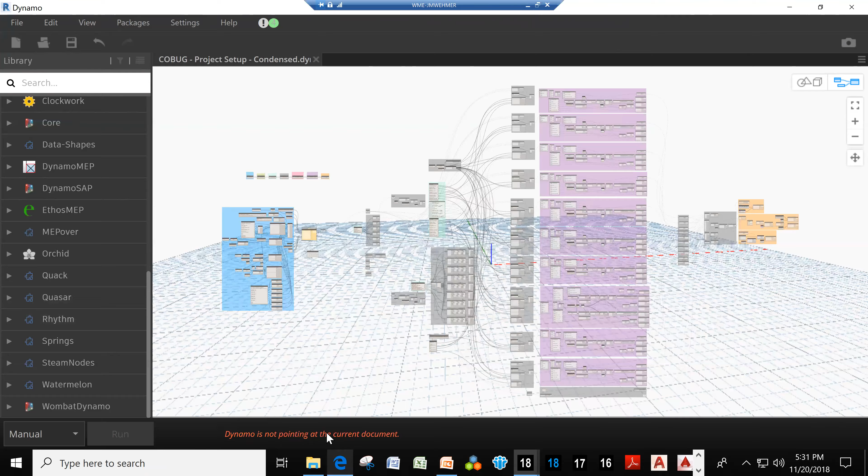The best place for getting support is dynamobim.com—that's a very active Dynamo forum, they're extremely helpful. And then also the Dynamo Primer. You can just Google Dynamo Primer, and it's an entire book Dynamo has written covering everything about their nodes, their scripts, and how to use Dynamo. It's very, very comprehensive and well thought out and written. It'll tell you the user interface, everything. It's very good—I cannot stress how good it is. It'll tell you how to do DesignScript, which is the name of the code it uses.

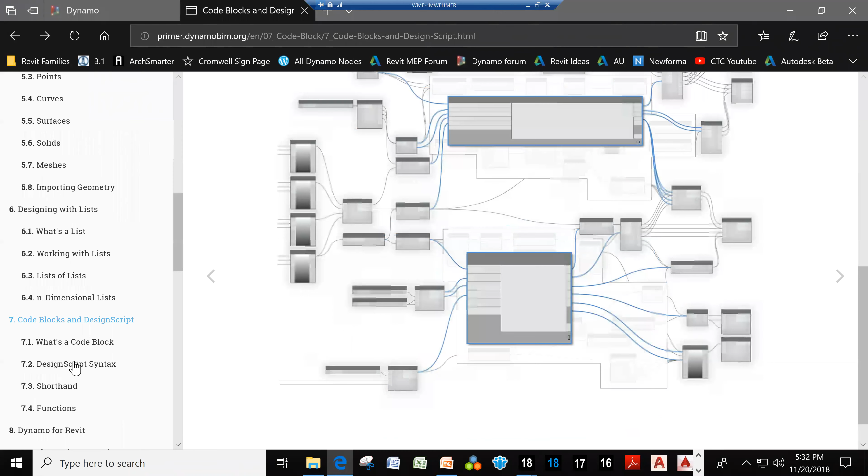Let me go back to it. I'm sorry, I'm right on the edge of where the mouse is good and where it's not in our conference room. It'll tell you how you can write your own. Dynamo Primer is probably your best bet for getting started. And then once you start writing your own and get stuck on something, the Dynamo Forum is a great place to go. They're very helpful, understanding, and knowledgeable.

Are you familiar with Evolve Lab? Familiar with what? Evolve Lab. John, are you familiar with Evolve Labs? With who? Evolve Labs? It sounds familiar, but I'm not personally that familiar with it. Here, hang on, I'm gonna take the mic to Tracy here. All right, I'm fat, I don't move fast.

Evolve Labs helped me out a lot when I was having problems with some of my scripts, or graphs as they call them in Dynamo, not scripts—old school, sorry. Anyways, they were a really good resource too for me when I had questions. It's kind of like a forum, but they do other stuff too. Fantastic, I'll have to check them out. Got it—Evolve Labs. I like that, I'm always up for finding new forums to ask questions and learn from other people's questions.